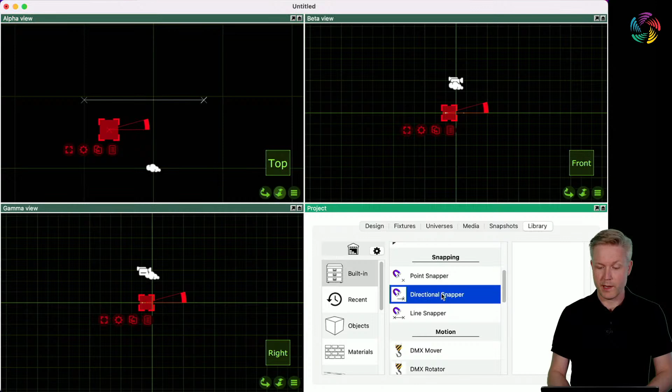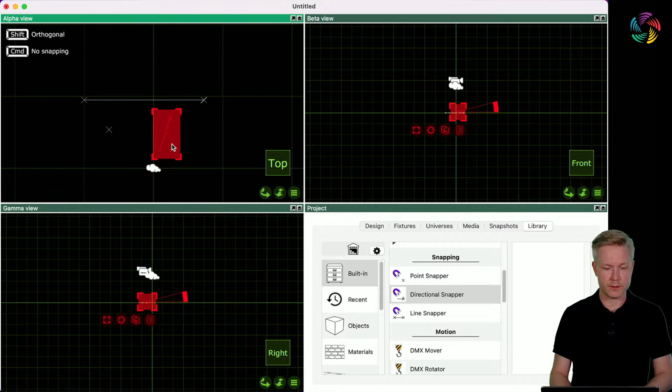So if you have a line snapper and a point snapper, the point snapper obviously snaps to the line. If we have a directional snapper, not only does it snap to the line, it also adjusts itself so that it's orthogonal. If I have it tilted a few degrees and snap it to the line, you can see it straightens out - that's the system you'd see when fixtures snap to trusses. A tilted moving head snapping to a piece of truss straightens out as it snaps.

As you may know, we have a system in snappers called match, which lets you say that one snapper only snaps to a specific set of other snappers. So if you have a conference chair system where they hook together, you might give them a specific match like 'chair', so that only chairs snap together with chairs. If you've worked with snappers before, you may know there are special reserved matches that let you snap things together with other library items. One particularly interesting for the line snapper is the fixture match.

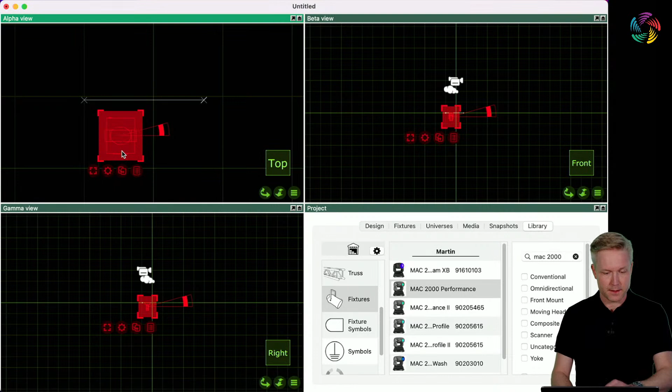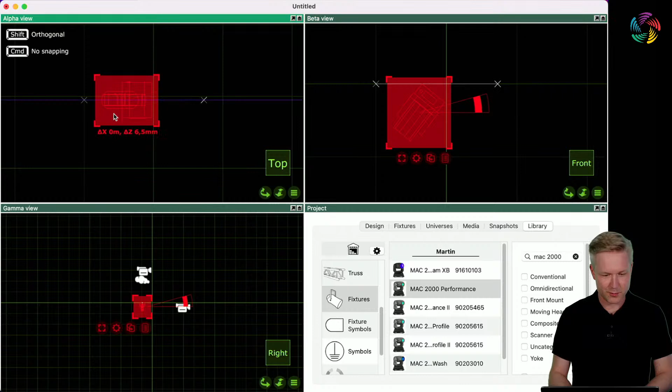So if we type fixture in here and grab a fixture from the library - I'm back to using MAC 2000s again - if I now move this towards the line, let's tilt it a little first. Then you'll see that when I snap this, it doesn't work. That's a bit weird. Let's see, this is terribly awkward, why doesn't this work? Did I miss something? Is the match set to fixtures? Although I tried this before... no. Well, that's disappointing.

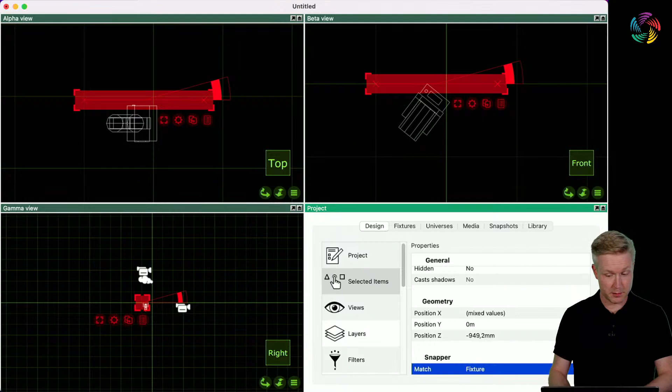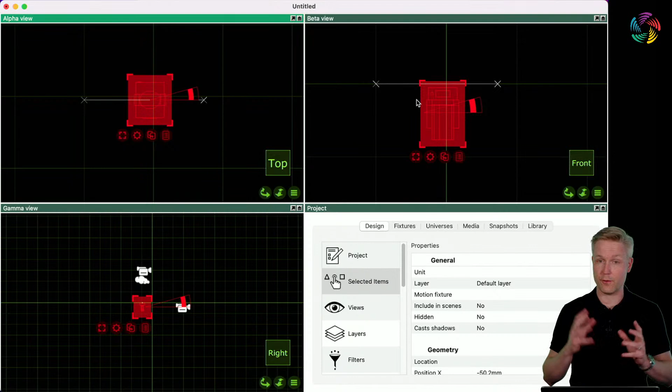Fixture with a capital F. Yes, there we have it. All right. This is written in the manual. If you don't want to take your chances, you can read in the manual what it's supposed to be. So again, if we have a fixture here, this now snaps to the line snapper and automatically orients the fixture so that it fits the line snapper. Great if you are building some very specific custom objects.

Now let's see if we have a few questions here before I move on. I'll just shoot a few very quick answers. Emiliano is asking if it is possible to open MVR files with Capture Mobile. The answer is no. I doubt that will happen either, because you would need to have the Capture library in place as well in order to have fixture definitions, so doubtful.

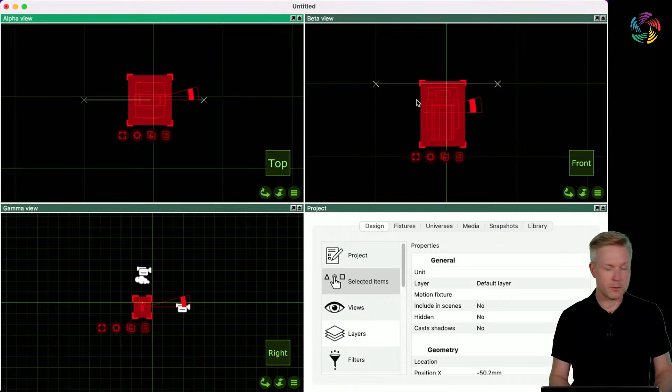And Emiliano is also, sorry, Radio Loss is asking whether there will ever be an Android version of Capture Mobile. I think at the moment, on some kind of semi-short horizon, the answer is no. Maybe at some point in the future, but there are no plans for that here and now at least.

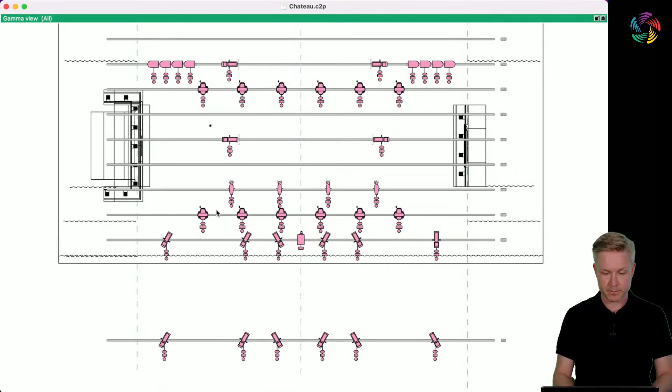Right, now I'm going to move on to measurements. Now in the last webcast I showed you the new measure mode and some new measurement properties, but there is one more that I want to show you specifically. So let's start with taking a measurement. Let's use the nice measure mode we have. So here we have ourselves a distance measurement, and it reads 2.92 meters.

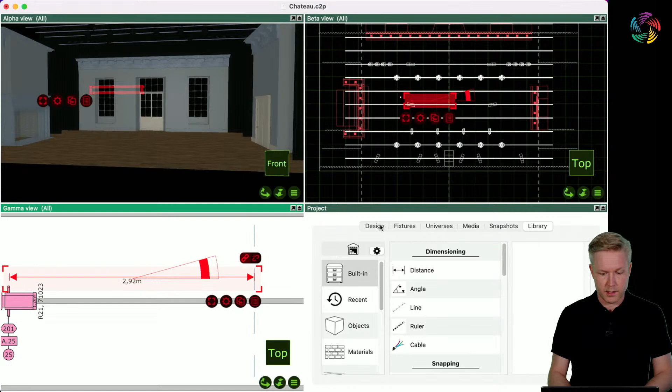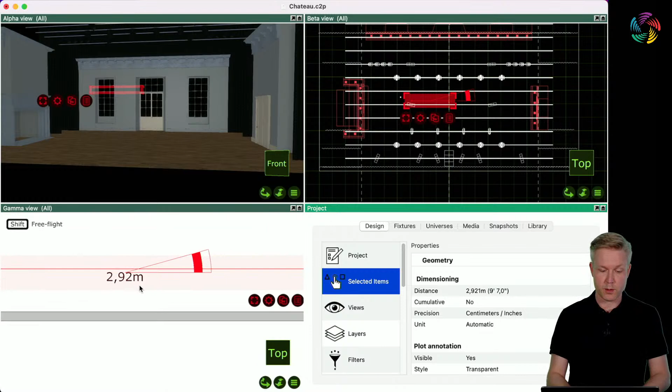If you remember how this used to work before 2022, you know that it would have read 2 meters 92 centimeters or 2 meters 921 millimeters or something like that. But that is a change we did in 2022, that we don't show these mixed properties anymore. We use only one unit. So it says 2.92 something meters.

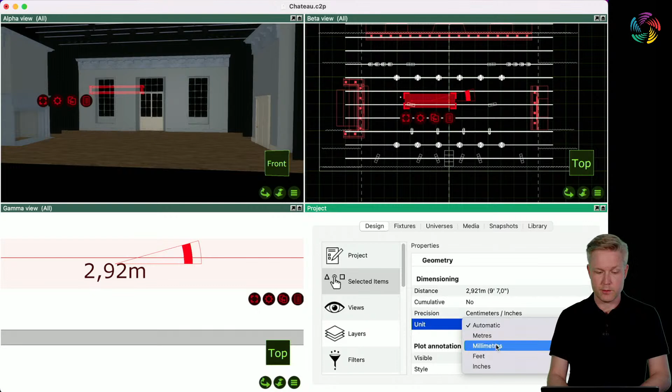Now something that's new in 2022 is that you can actually override and choose which unit you want it to be. The default is a sort of automatic setting, but you could force it to millimeters, for instance. And this works in combination with a precision option, which isn't new, but is perhaps more meaningful together with the new unit option. So this applies a rounding to the textual description of the measurement.

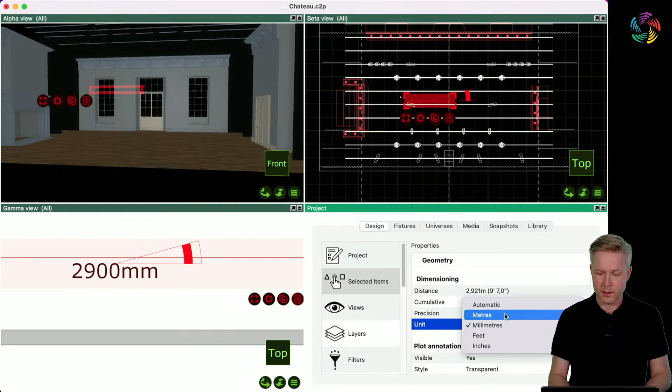So this way you can force the measures to be shown in a more specific way that suits your needs, as these vary around the world and there is no proper standard for what it should look like anyway. So, no specific questions on what I've shown you so far. I'll just shoot a general question in between.

Boris is asking about whether we could show something about synchronizing Capture with consoles and specifically the Eos console. I believe we have a tutorial-ish video on some ETC Eos integration already. The truth is not much has happened between Capture and consoles in general for some time, so it would feel like we would just shoot the same video again. So please go and check the videos we already have, even though they are a few years old. I doubt there's much difference. But maybe it's time to review that and see if we should indeed shoot something again.

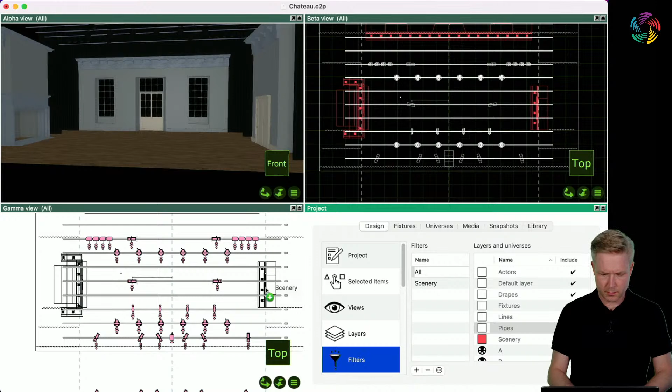So I'm going to move on to groups. We did some pretty major changes to the way groups work in 2022. I'm going to apply a little filter here and build a couple of groups to show you. Now I'm just going to do something super simple with boxes. I know sometimes my presentations are a little bit boring in terms of the objects we use, but it's the principle that matters, right? So let's kill the measurement we did. Now I'm going to just lay out 3 boxes here and group them together.

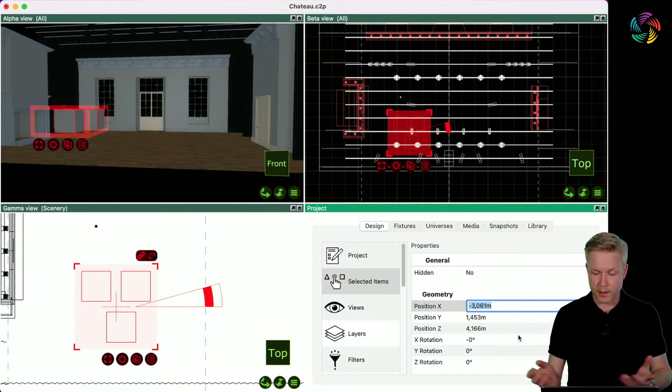The first thing I would point out is this little crosshair that has appeared, and this marks the center of the group. This is the geometric center, and it has been computed automatically when I created the group. This crosshair is also where the XYZ position is measured from. Before 2022, the XYZ coordinates here were not actually of the group, but all of the objects. But as of 2022, the actual group by itself now has a position. So if I change this to -2 meters, that's where the crosshair of the group is now.

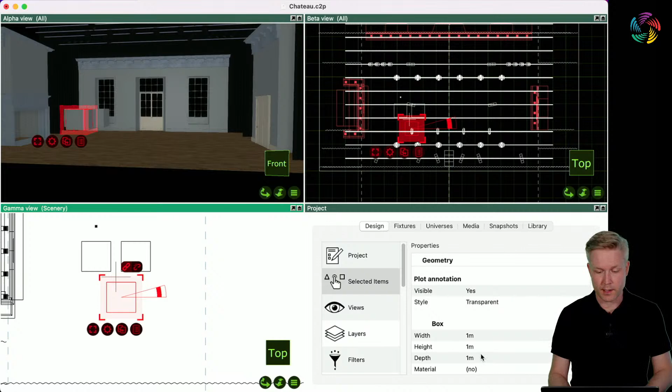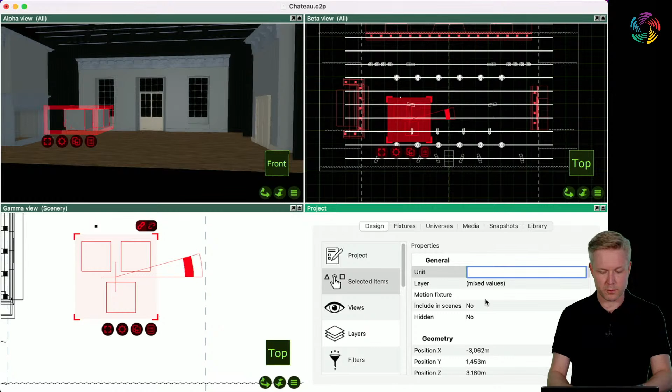Another change as to before is that if I now double click on one of these objects, I'm drilling down into the group, and now I've actually selected a box, which means I get the properties of the box here now. So when the group itself is selected, we don't get, well, actually this isn't quite true, we still get a lot of properties, but it's important to keep in mind that the coordinate here and even the unit is actually that of the group. So if I type group here, the text group appears where the group is, and not once in every box as it was up until 2021.

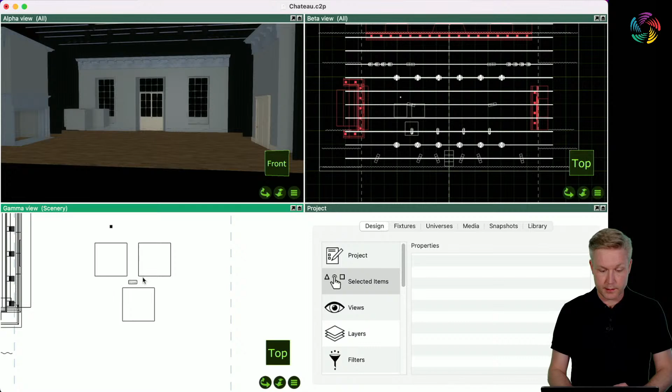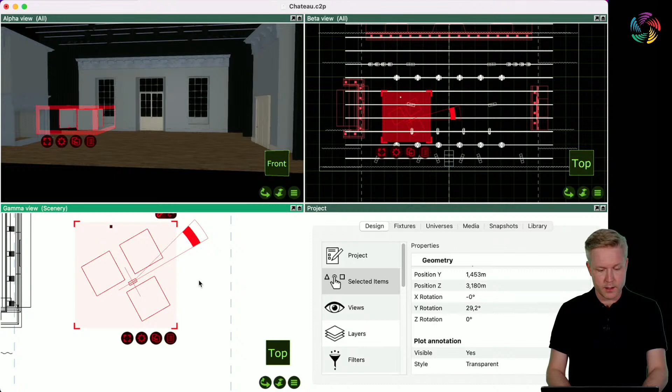And it's not just the position, right? So if I rotate the group, I'm also rotating the group as such, which means that the rotation angles are that of the group. So that is also different from before then. Now, sometimes, especially if you're working with scenery on stage over multiple scenes, then you have a need to add something to a group. And users used to then break a group and recreate the group.

The thing though is that if I do that now, if I break this group and create a group again, then that coordinate and the angle is lost because that was associated with the group that I had. So if I undo back here, I'm back again with the original group. What you can do is if you add an object, using the drag and drop or quick copy button, the third one here, I can now drag and drop it onto the group.

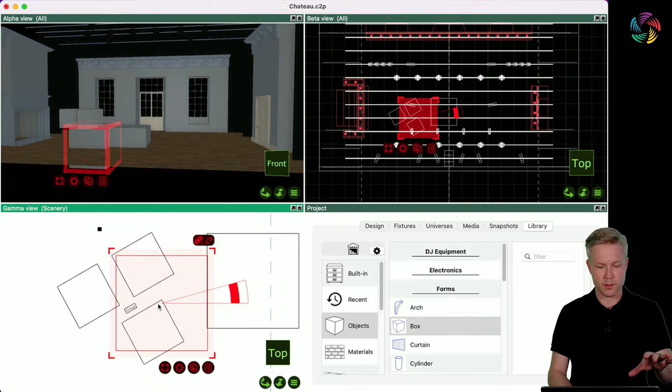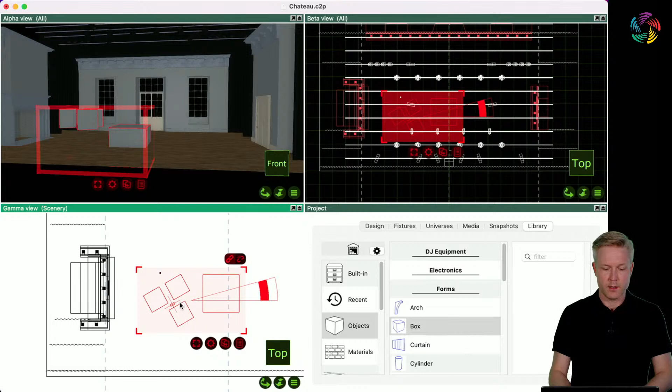Yeah, if my hand was a little bit less shaky, I could do that. There. And now I've added the new box to the existing group. This means that the group itself retains the coordinate and the angle. And this is particularly useful if you have recorded positions in multiple scenes.

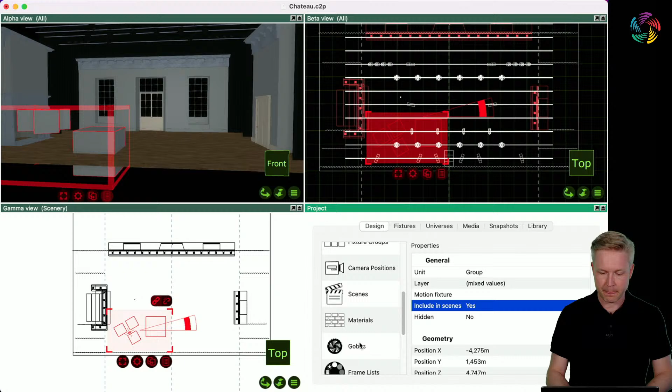So let's place the objects on stage right in the default scene. Let's switch to the new scene without forgetting to actually include the objects in the scene. So let's switch to new scene, move them to stage left. And as you can see, we've got the objects in two different locations.

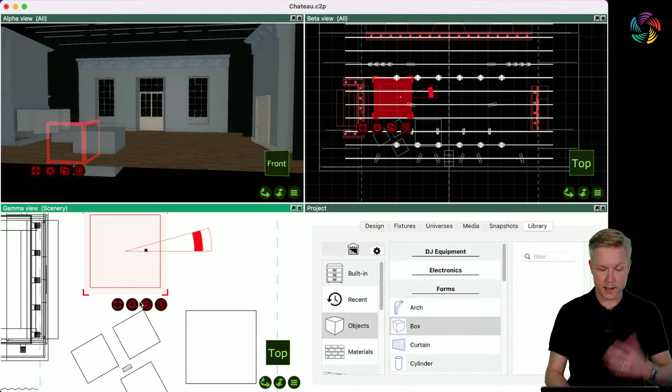If I now add something to this group, if I add one more box, I add it to the group, I go back to the scenes and change to the other scene, you will see that the newly added box now tracks the location of the group.

So this lets you create constructions on stage that hide, unhide, or change locations, and you can modify them, add stuff into the group. You can also delete an object within a group, or even break it out of the group, which means the object still exists, but it's no longer part of the group, making it a lot easier to work with objects across scenes.

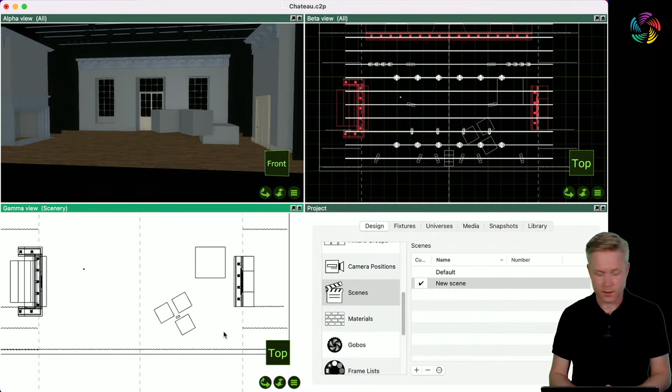In addition to this, the include in scenes property here always applies to all of the objects in the group. So if I have a group that is included in scenes, then anything I put in the group is automatically included in the scenes. So there's no risk of forgetting that, which was a real risk up until Capture 2021.

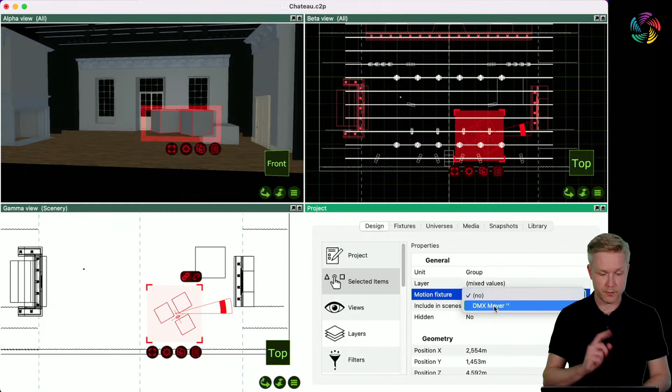It is also the case that if I associate the group with a motion fixture, I have specifically added one here, then automatically all the objects in that group are also associated with the motion fixture. So if I take this box here now that I took out of the group and put it back into the group, then it's moving with that motion fixture.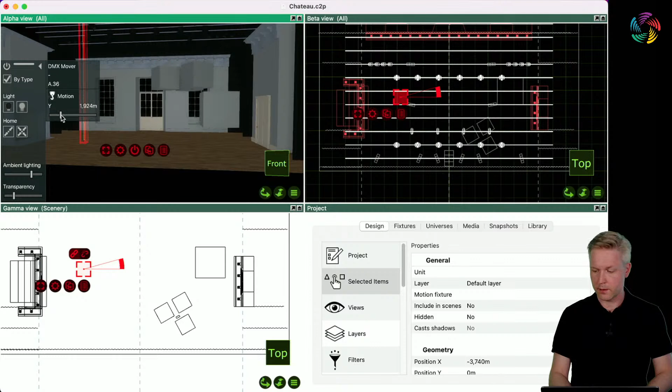So as you can see, there's been some evolution on how groups work and how we can work with them across multiple scenes, which I realize not everyone does, but if you do that kind of stuff, then it's really important.

So let's see if we have some questions here. Emiliano is applauding the group changes, so thank you.

Julian Yamin writes, sometimes when mirroring objects imported into Capture, the mirror image is not exact and with certain offsets. Is this avoidable? Now, I think we might have needed a specific example project file to have a look at. The one thing to keep in mind in Capture when you mirror things is that it's not like a mirror in a CAD that flips something like you would flip a burger or a pancake, because that doesn't actually work in reality. So Capture only moves and rotates objects, which comes with some limitations, but also prevents you from breaking the laws of physics.

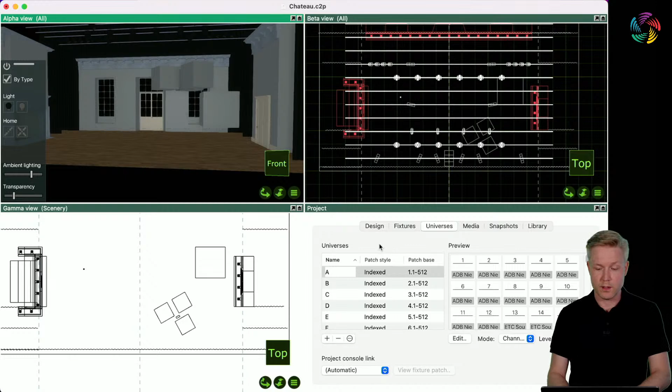And with that, I will move on and we will take a look at some changes we did to the universe view. So in 2022, we introduced two modes to the view, the channels and the fixture modes. The channels mode is the one that is most similar to what we had before.

One of the differences is that we removed the line that tried to write out the name of the channel, because by the end of the day, we could only fit a few characters, and usually that wasn't nearly enough anyway. And it really bloated the size of the view. So the new look is more compact.

Another thing that is very much new here is the way we treat fixture overlap. So if I patch a few overlapping fixtures here, you can see that they build up this stack. And what used to happen was that this stack covered the information in the next row, which no longer happens.

And perhaps most importantly, if I patch multiple fixtures on the same channel, let's do this instead, then they don't stack. So in this case, I've actually got 3 DLX spots on the same channel, but it just shows as a single bar with a plus. So this has increased readability by quite a lot.

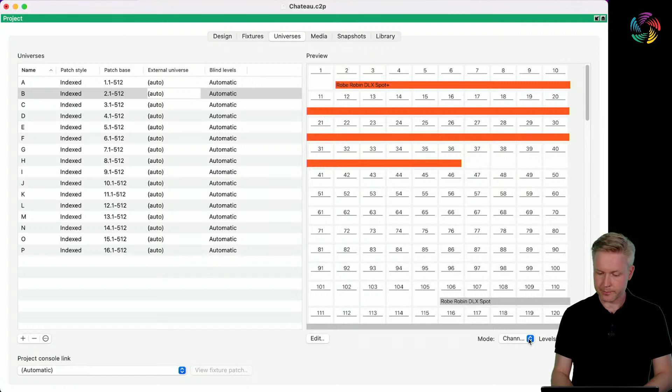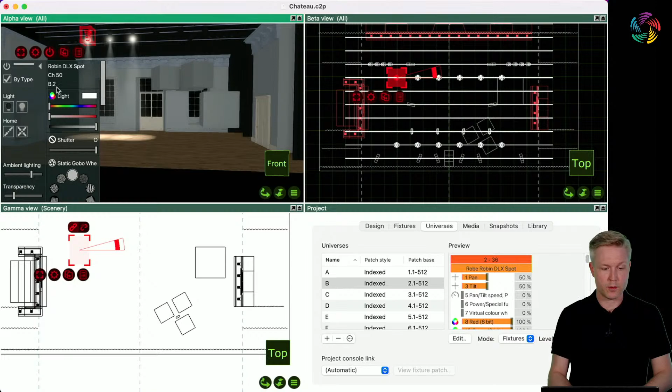Then we have the fixtures mode, that rather than looking at the 512 DMX channels, looks at the fixtures one by one and its parameters. So this, in a way, is a complement to the control pane we have here, in that we can actually modify the channels in here, or parameters. So if I run tilt first, then pan. So if I run pan and tilt, you can see what happens here.

And this way you also get access to a few features that don't actually exist in the control pane. Now ideally, we would have everything in the control pane, but it's not always the case. Well, then it's quite useful to have direct access to the parameters here.

It's also very useful if you find yourself in a situation where you're wondering why a fixture isn't doing what you think it should be doing, then it's much easier now to see which parameters might be set to a value that you don't want them to be.

Yes, and one more thing I would like to point out in here is that, especially maybe for 16-bit parameters, you can make fine adjustments by holding the Shift key, which then moves the slider much slower. So if we change to DMX values here, it's probably hard to see, but by holding the Shift key, you can actually hit individual values in a way that you couldn't otherwise.

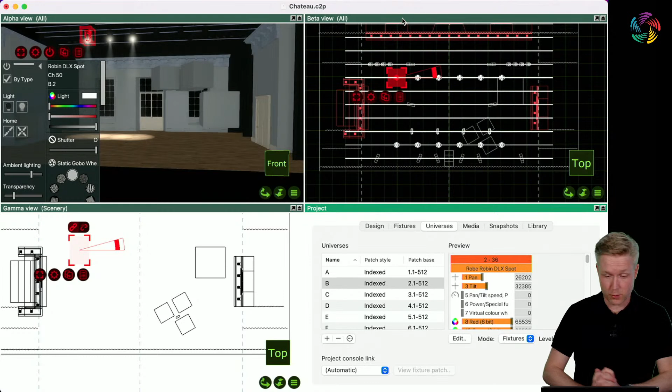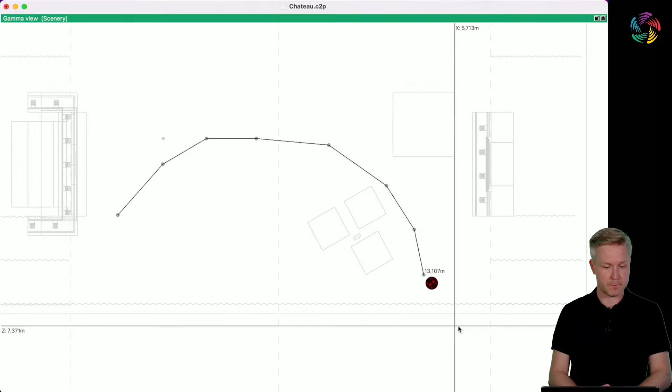Bernat asked a question in relation to the dimensioning and the measures. He's asking whether there's a way to measure a curve. The answer to that, unfortunately, is no. You cannot really do that. You could create a multi-point measure that sort of follows a curve. So by holding the Shift key, you could do something like this, but it's not really what you're after, I suppose, but it's the closest you could get anyway. Perhaps in the future we could add that.

Before we leave the magic world of the universes, I also want to point out that we've changed the default naming of the universes. This is an old project file, which is why the names are ABCD. But if I start a new file, you will see that the names are now 1, 2, 3, 4. So this is now the new naming convention in Capture.

Now, if you prefer the alphabetic naming, you can of course still edit the name and change it to whatever you want it to be. It doesn't affect the way universes connect with your console or anything like that. It only really affects the textual information in the paperwork. So in this file where I have the alphabetic naming, if I now change the name of the universe to 1, it says 111 instead of A11. And that's really everything that changes here.

And we've added a function. So when you hit the plus button here, you can now add multiple universes. So if you need 200 universes in a go and you don't want to hit the add button 200 times, you can use this little feature to do that.

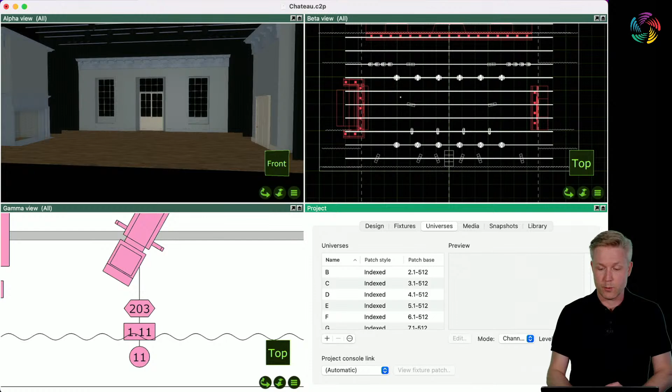And I actually only have one thing left on my list that I wanted to show you. And that was the library symbols category. So we've always had this category with fixture symbols, and somewhere in the middle you will find generic, which has some non-brand symbols. And this category used to contain a bunch of other symbols that were a bit hidden, so we decided to have a special category called symbols that contains those.

Here you will find a few symbols for various accessories. We have a few connector type symbols, extras, some house information like a guy falling down a huge hole in the stage. Very good. Sightline warning, some power outlet symbols, and of course our rigging points, which I believe are also available under built-in, because these also function with reports in a very specific way.

If you need other symbols than we have here in the library, we would appreciate if you emailed us and let us know what kind of symbols you frequently use that are missing, and we will be happy to work on that.

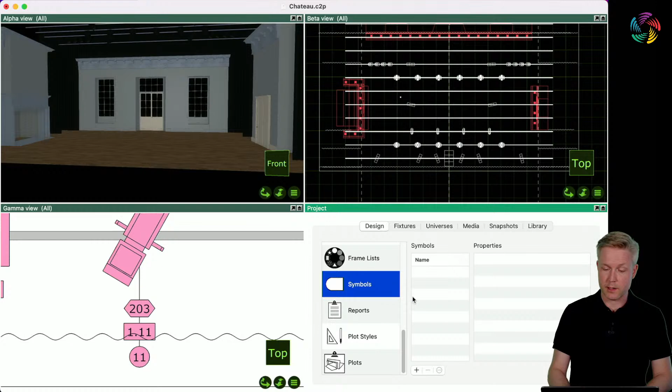However, it's also worth pointing out that another new feature in 2022, that I believe we covered in the first video here after the release, is that you can add your own symbols by importing them from an SVG file. So that is really useful if you don't want to wait for us to add something to the library.

Radio Loss is asking, how can I assign multiple zones like with an LED processor? I guess I don't really have a good answer to that. LED processors are not an area where we've managed to do a lot of great stuff in Capture yet. I think you would need to create multiple texture generators, one per DMX universe, and stitch them together like that.

I guess that's all I can say about that at the moment. Again, you might want to reach out to us at support@capture.se in case we can give you some more specific advice based on what exactly it is you're doing.

Emiliano is asking in relation to the WWDC, which is Apple's developer conference, which just ended, whether there are any changes in Metal that we could take advantage of. And we've had a brief look, and there might be. I would say that if there are meaningful, good improvements, then of course we will be using them. We keep an eye on these things, so it's not like they go unnoticed. So if there's good stuff there, then I'm sure we will be picking it up.

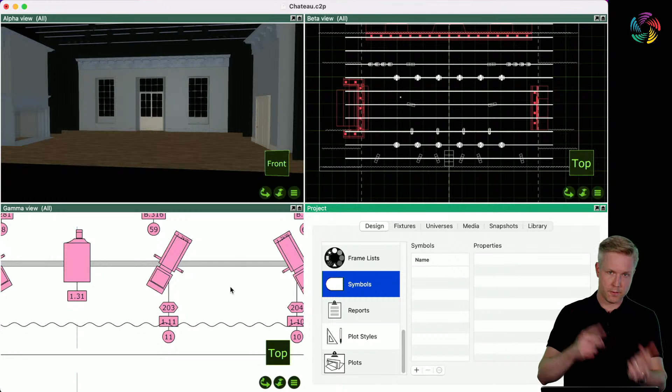Julian Yamin is asking whether we could see fixture information in the library. At the moment, this is not possible. You would need to add the fixture into the design before you can do that.

Sustain VT says that plug boxes are missing as symbols in the library, and this is quite true. We would like to do something more intelligent with plug boxes and cabling in a future version. But we should probably look into at least adding some plug box symbols until then. So well pointed out.

Emiliano is following up on the Apple Metal question about HDR. So the one thing Apple are bringing to iPadOS is HDR support for Metal applications, which we will be enabling as fast as possible when that iOS version is out. Actually, it's strictly speaking not a new Metal feature, I guess. That's getting very detailed, but we have everything in place, obviously, from the macOS app, so it's just a matter of enabling it once it works.

And finally, last question from LX Design. I believe this is a request for more symbols, and that's power outlet with DMX information. Now we do have a few power outlets already. However, they do lack, I believe, any DMX information, so you would need to enter that as the text here. But you can do that.

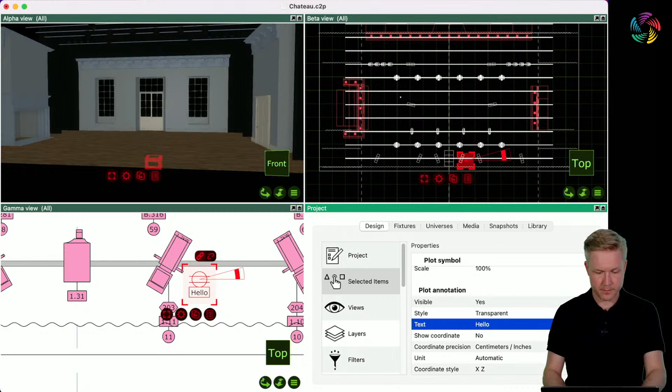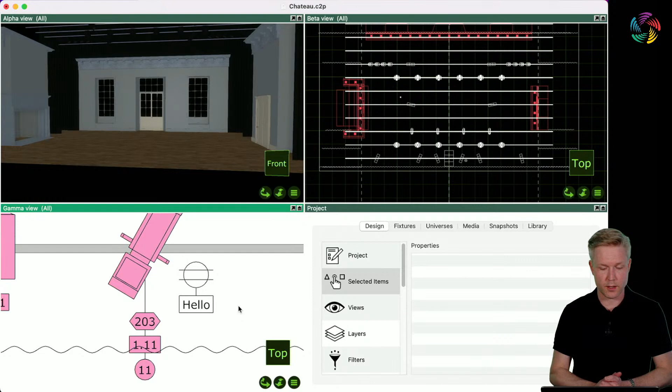So it's worth knowing that if you drag a symbol into the design, you can add your own text to that, which is an annotation that you can move around as well. So just as with the fixtures or other objects in the library, you can still add textual annotations to these symbols. So here you could easily add some DMX information. Of course, it doesn't show up like a fixture in a report.

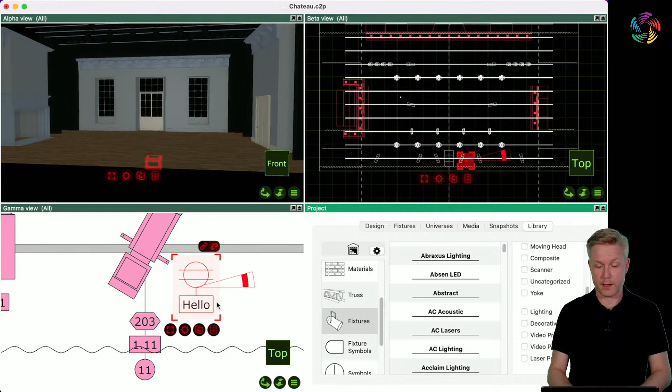In that case, a workaround might be to use some kind of omnidirectional fixture, or even just a generic Fresnel or whatever, to get the symbol and input DMX information that ends up in the report.

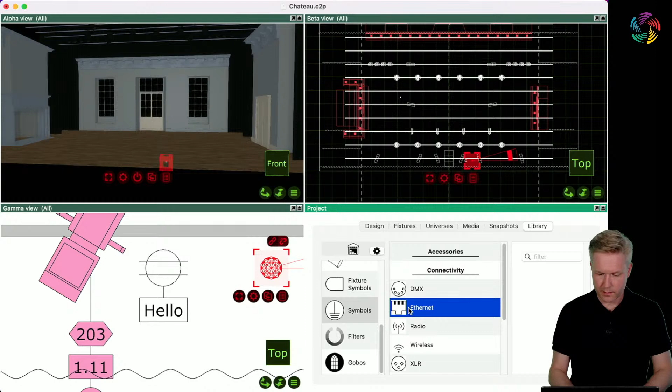But I was thinking you could do something like this, and then choose a symbol that suits you, like maybe, I don't know, Ethernet is a bad example, but let's take a DMX connector, associate that with a fixture. Let's patch it. Let's say universe D channel 34.

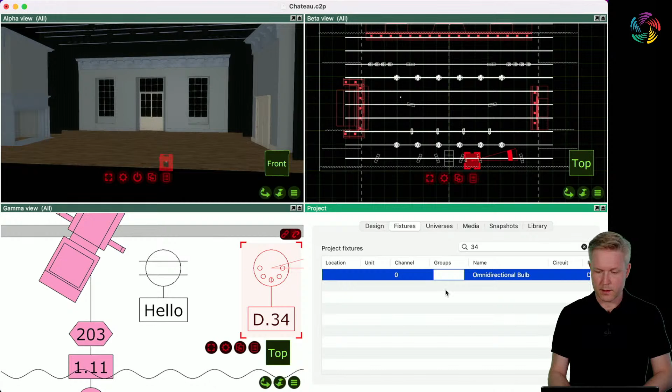And now we've actually got something that is, in a sense, DMX patched and even shows up on reports. So this could be a way of adding outlets or other kinds of connectors with a DMX address in this case.

So with that, I think we've managed in this little series to cover nearly all the new features in Capture 2022.